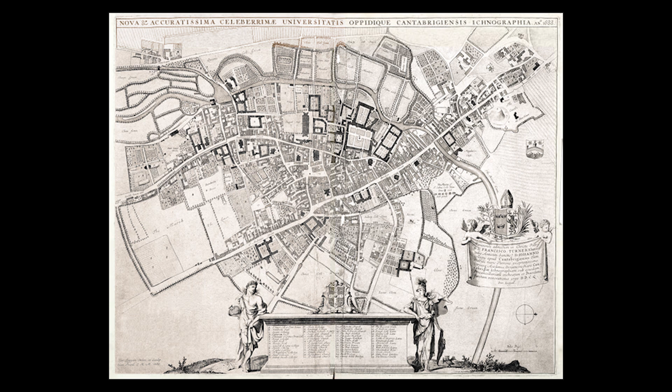So this map from the 1600s shows that while most of the colleges in Cambridge were located in the centre of Cambridge, Magdalene College was located on the periphery to the north of the river. The River Cam here, and this is Magdalene just to the north of it. It was initially established as a monastery for Benedictine monks, and it was said that it was located there to keep the monks away from the temptations of the town. And since then, there's been a sort of continuous tradition of academic study on the site for about 500 years.

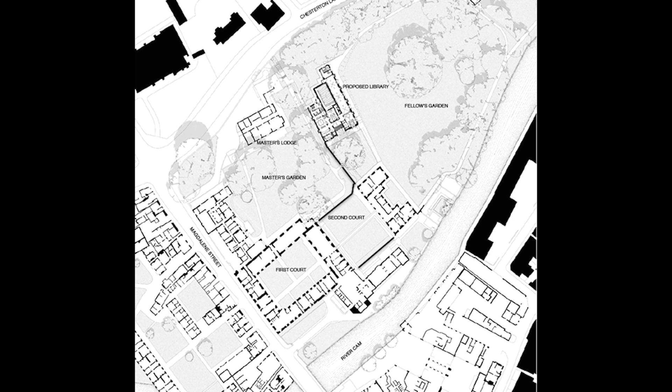And although the site, I guess, appears quite open, there were a lot of constraints which led to the position and massing of the building. The floodplain of the River Cam extends over a lot of the Fellows Garden. There's a lot of mature trees. There's a pet cemetery to the north, and there's a listed garden wall to the west.

And in the early stages of the project, there was a lot of debate about whether it was appropriate to put a new building here at all. And Historic England were very good; they sort of gave the planners confidence that a good building could be positioned here in this context successfully. And it was through those conversations that the exact position of the library was determined. So it's in line with the existing garden wall, and the entrance faces the side of the Pepys building, which extends the quadrangular arrangement of the college.

And I'll hand over to Tim now. Thanks, Claire.

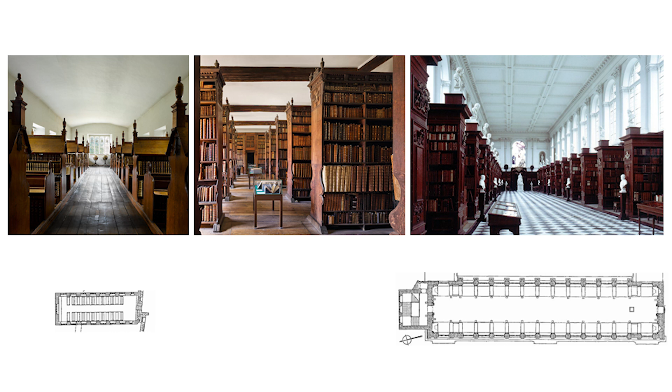These three images show a key period in the development of college libraries. The colleges in Cambridge and Oxford, there are three main spaces where the community comes together. One is the hall where they eat, one is the chapel, and one is the library. And so the spiritual, intellectual, and nourishment are provided in these three different spaces.

And so these three images of libraries in Cambridge show basically the impact of the printing press on the college library. On the left-hand side is Trinity Hall, one of the oldest libraries in Cambridge, and this is a lectern type of library. And we're interested in this relationship of the desk space to the reader and the illumination of the space and where you place windows in it and where the books are held. And so you begin in the beginnings of the college library.

Books are an incredibly rare and precious resource, and so they're all chained to the desk and they're held in these lectern arrangements where you have the books beneath and you lift them up onto the lectern and you read them standing up. And the room is a long room with a central aisle down the middle, and the reading space is off to either side, and it's illuminated from the sides by quite low-level windows.

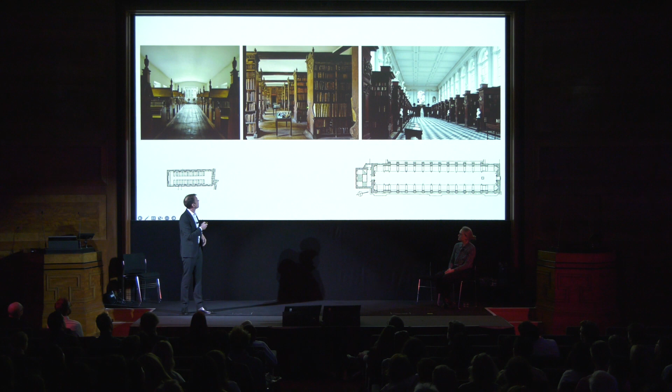And then as the quantity of books available increases, in the middle this is Queen's College Library, and here they've adapted a lectern library. You can see the curving bases of the lecterns have been chopped off at the top, and an extended bit of bookshelf's been stuck on the top. And this room is still illuminated from the sides, and that produced a problem because the room starts to become quite dark on one side because the bookshelves are cutting off the light that's spilling in from the windows along the sides.

And then in the final image, you see Wren's library for Trinity College. And here he resolves this problem by making it a two-story space and having light flooding in from above. And you can see the two plans at the bottom here, Trinity Hall and Trinity College, they're the same scale, so you can see the enormous expansion of the library as a repository for books. I do think the main problem of the Trinity College Library is, if I can dare to criticize Christopher Wren, that there's no way to gaze out of the window when you're bored of your book.

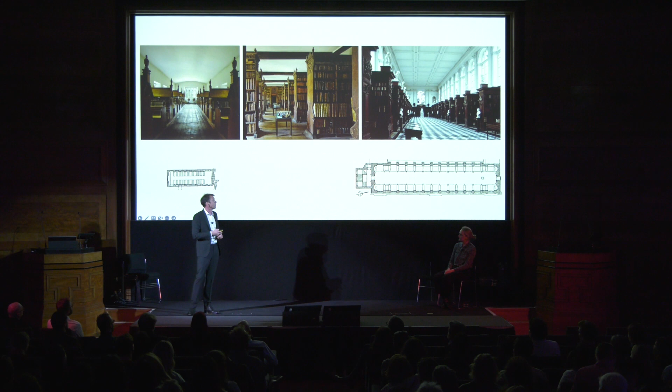So for Magdalene College's library, we wanted to produce something which had a bit of a mixture of all these types of space. The college had done a survey of all their students early on in the design process, and they wanted different things from a college library. And so we thought an inclusive type of modern library will be one in which people can situate themselves in different spaces around the library, rather than having a consistent type of relationship between reading spaces and bookshelves.

And so on the left, you can sit yourself in a larger grand hall if you like that kind of vista, you can find a small enclosed room with a shared table with other readers, or you can perch yourself into a corner in a little nook. And so in the design of the library, we tried to find a way in which we could generate a plan form for the library which produced that sort of variation.

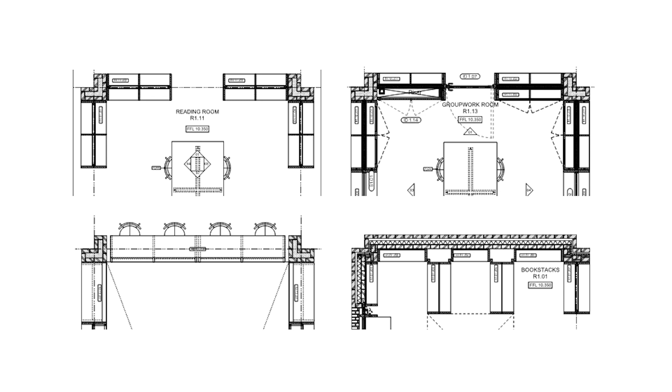And around the edges of that space, then we have a kind of zone, which is, you can see at the top left, big enough to accommodate a double-sided bookshelf. Below that, it can accommodate a desk, and it can also accommodate services and an external wall plus a bookshelf. So it was calibrated to be big enough to accommodate all these things, just about.

And that became a kind of essential dimension within our building, which is actually 3 bricks long. And then we looked at how we would aggregate those rooms into a larger plan. And we wanted the form of the room to remain legible within the plan.

And so we thought about this building on the left here, the Centraal Beheer office building by Herman Hertzberger. And it's an amazing plan form. And there was a sort of resonance for the project for us because he was trying to humanize, in a way, the open plan office. And we're trying to find a way to make people feel situated in an essentially open plan library space.

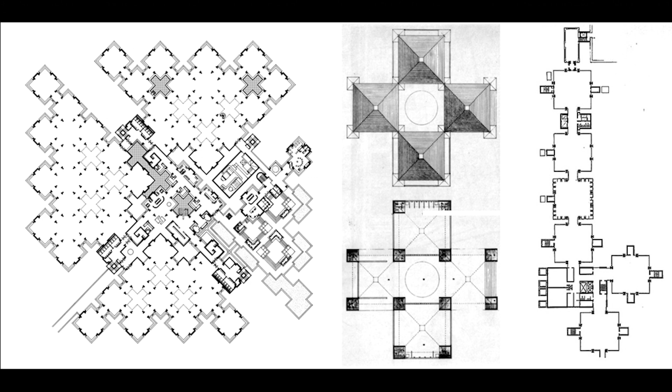And then the 2 plans on the right, both by Lou Kahn, the Trenton Bath House and the Richards Medical Research Laboratory. And in a similar way, we enjoy the way the different parts of the plan are legible. And they use this, what we call a tartan grid, which has a major and a minor interval within it to space the elements apart and give the building a kind of rhythm. And we thought that sort of plan form might allow us to produce the variation in seating types and position within the library that we were looking for.

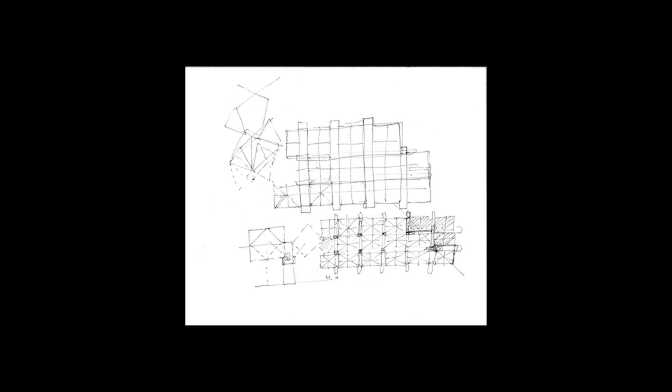And where they cross, you get a kind of node. And that gives us a wider space as a passing place, which allowed those passageways to actually be quite tight. They're only 1.3 meters wide. And those nodes we use to develop the structural scheme and the building services scheme for the building. And so our plan form is 3 bays by 5 bays, and it has a bit missing on its corner.

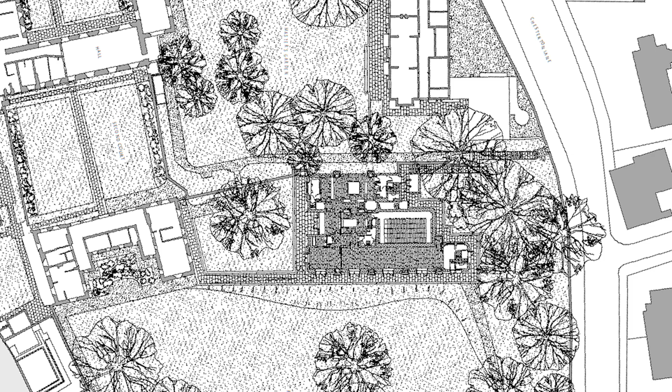And you can see when we put the plan into the site, as Claire was explaining earlier, that the building is kind of nestled into this bank of trees on the edge of the site, and its 3-bayed facade faces into the master's garden here, while its longer facade faces into the bigger space of the fellows' garden.

And then its short flank squares up to the end of the Pepys building, and part of that conversation Claire was talking about with Historic England: because our building is a bit wider, we sort of splay out this path so it doesn't run quite perpendicular to the back of the Pepys building, in order to give ourselves enough room to get our 3 bays in.

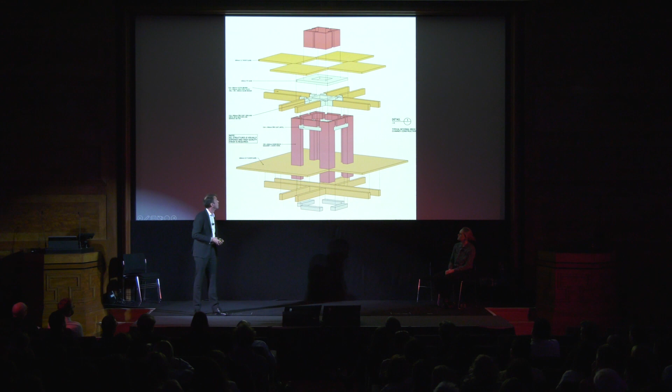And the lantern is just quite simply formed of 2 pitched roofs crossing at right angles, and the triangular gables are then glazed. And in the corners of this space, you can see that the load of the lantern drops down onto a point at this corner and then is brought down a brick column in the corner. And this is the structural diagram for how that works.

You see the L-shaped brick column dropping down through the floor plates, timber floor plates, and then the main structural beams, which then pass through those columns, resting on precast concrete lintels that connect the columns together.

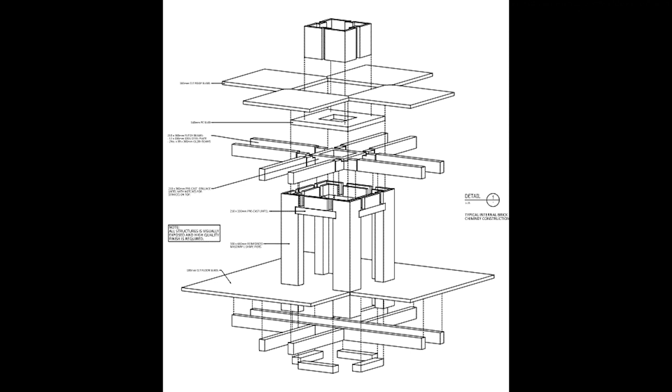And these brick constructions rise up through the building and become chimneys as they exit through the roof, which Ben will talk about later. And this gives you this landscape at roof level of folded roof lanterns and then pinned in place by this set of chimneys.

And so having made this kind of spatial matrix, this mat-like building of squares set apart by passageways, we started to think about how you would navigate through the library. And we knew at this point that the library would need to be spread over 3 floors, and that at the ground level there wouldn't be very much library. And there was a long conversation, which is an interesting one, with the college about how we would connect the entrance to the library, probably where the librarian would be, with the upper floors where most of the library floor plate would be.

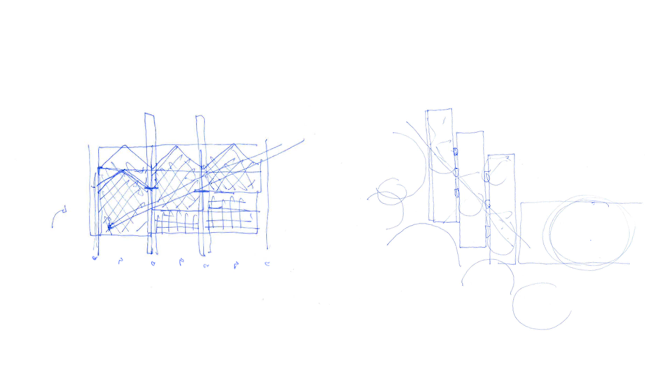And we had this idea of a journey through the library, which was a sort of diagonal upward journey towards the light, towards the view of the river and the garden that the building looks into. And it produced this kind of diagonal movement in the section. And you can see it here in this sectional sketch from the ground floor up to the top of the building. And we thought this diagonal movement might also be matched as a movement in plan.

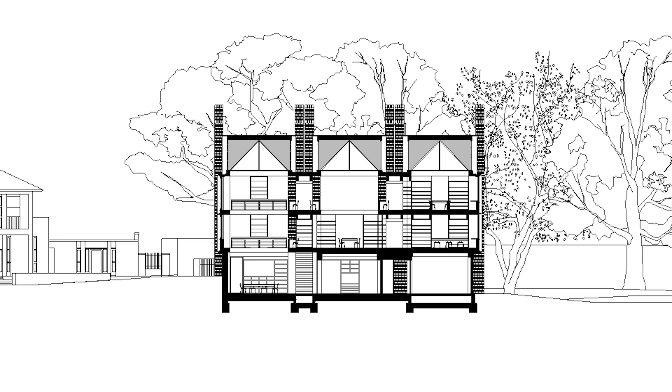And so this is the building section. You come in here at the base of the building at ground floor level into a 3-story space here, and you make your way up to the first floor. The first main level of library is via a stair, which delivers you into a 2-story space in the middle of the plan, and then you find another staircase, and you work your way up to a room sort of up in the roof with the view out towards the garden.

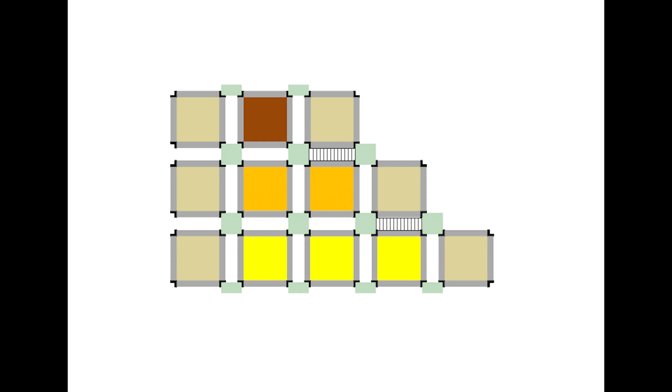And that movement, as I said, is matched in plan. So you see this is the 3-story space. It's 1 bay in plan. The 2-story space in the middle is 2 bays in plan, and the single-story long reading room at the top is 3 bays in plan. And they're connected by stairs at the ends. So you get this kind of diagonal movement through the building.

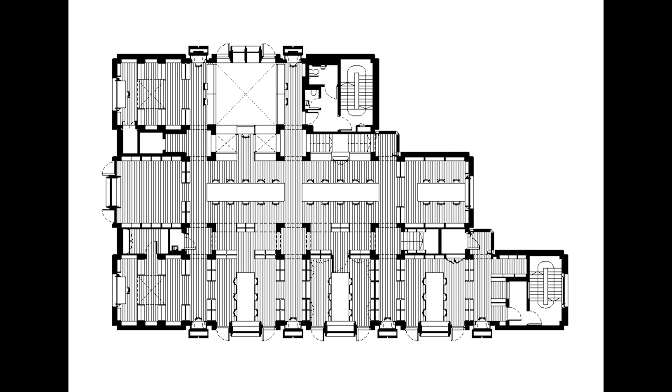before you head back in, and you arrive at the north end of the central reading room with a long reading table down the middle of that plan. That's our sort of grand space within the building. So this is the first floor plan, and you've arrived here on the stair at this little bay window, and you're standing here looking down that long space. And all the smaller rooms are arranged along this side of that reading room, so they get the view out towards the garden.

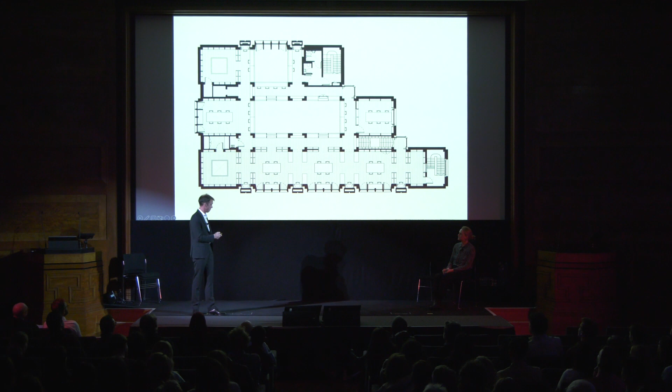And so while we've been kind of enjoying the organization of the building as a problem to solve, the client for the project was very concerned about this object that they were going to put within the historic centre of the college. And they became particularly concerned when we started talking about putting chimneys on the outside of the building, and thought that we were going to make some sort of factory. So we had an interesting conversation with them about that, about the design of the outside of the building.

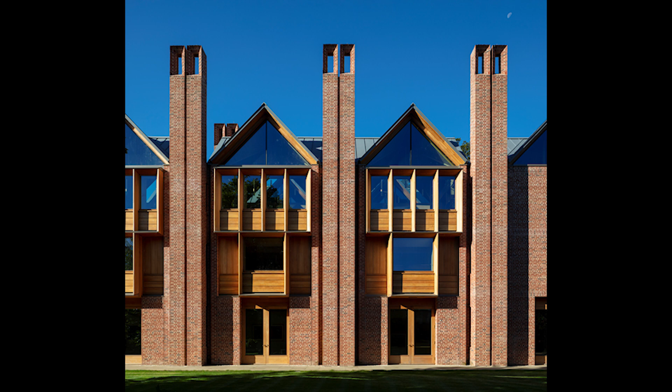Initially, we looked at lots of different options for the strategy for the building. We looked at fully air-conditioned, we looked at mixed mode, we looked at natural ventilation. We also visited several different libraries around Oxford with the college, and there was a clear preference following that for natural ventilation. So that's how we arrived at the strategy for this. We wanted to make use of manual windows in the facade so that people can just control their own environment.

To help make that work, we made use of the chimneys on the roof of the building to allow the stack effect, so buoyant air leaves the top of the building, bringing fresh air from the outside through the facades. The brick construction actually boosts that effect, so the fact that they're being warmed in the sun adds to the buoyant effect of air being drawn up and out to the top of the building.

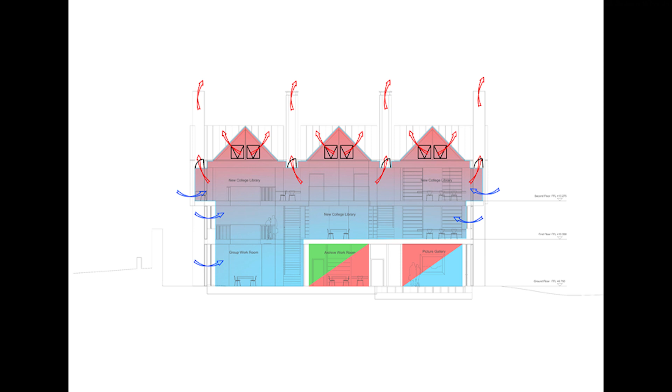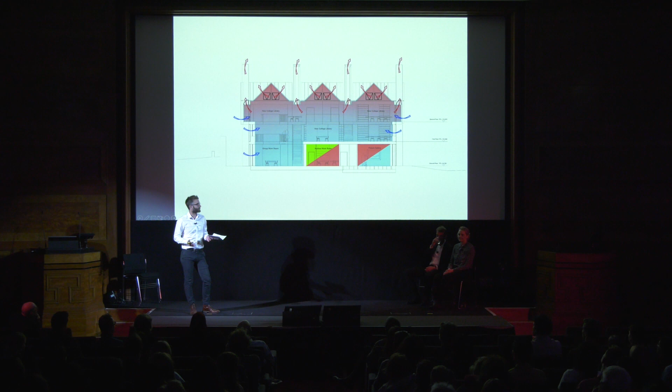So the chimneys are also key for winter ventilation. They're located in the center of the plan, and opening them a little bit will allow cool air to enter reasonably far away from where occupants are seated, so avoiding issues with drafts. Each of the chimneys has an actuator at the base, so that keeps the thermal line of the building reasonably straightforward. They're in the plane of the roof, so avoiding having to insulate the chimneys.

They're controlled on temperature in the summer, so when the temperature gets above 25, they begin to open. And then in the wintertime, they're controlled on CO2 in the space, so when that gets above 1,000 parts per million, they will begin to open. We also have additional openings in the roof in the centre of the plan, which are primarily for smoke ventilation, and they also boost the natural ventilation when everything's open in those hottest days.

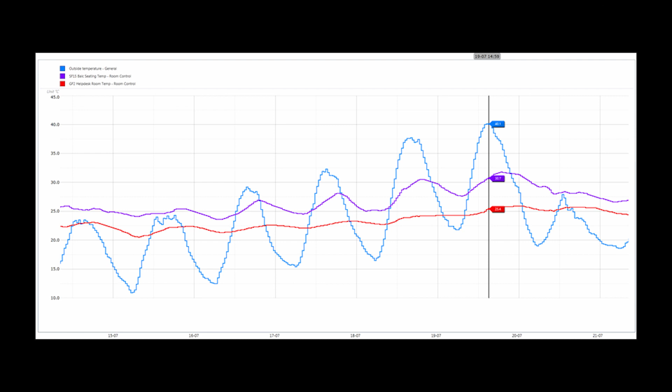So how does it perform in the recent heat wave of July? So you can see there, 19th of July, we had 40 degrees in Oxford, and I think quite successfully on the ground floor we had 25 inside and just over 30 on the top floor, which I think is quite successful for such an extreme test.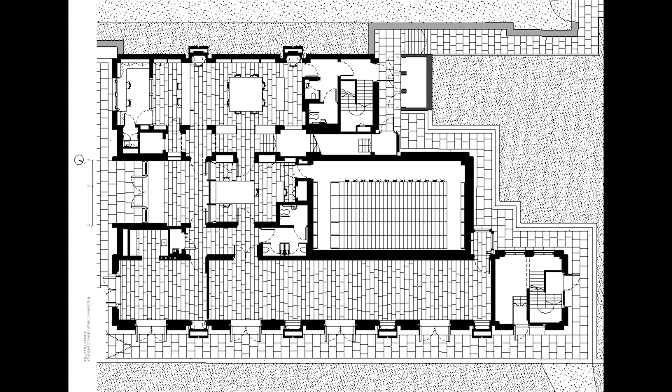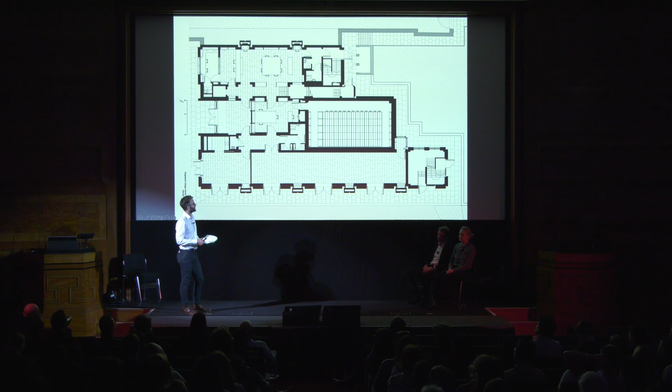Moving on to the archive, which we have in the centre of the plan. So at the ground floor, as Tim mentioned earlier, we have the storeroom, as you can see in the centre at the bottom, and in front of that, the reading room, where readers will have a look at material that has been brought out by an invigilator. So the brief for that was to consolidate a lot of different archival stores that the college had that weren't particularly well controlled.

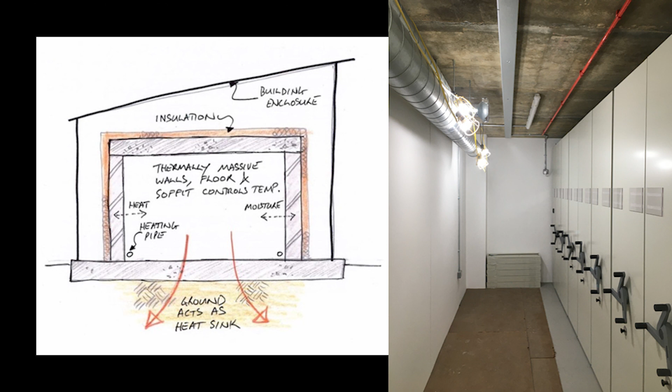So the brief for this space was for a mixed paper archive, and that requires stable temperature and quite low humidity. So the design we came up with was for a passive approach, which avoided complex and expensive systems, and instead relied on passive ways of keeping the conditions stable. So we use an uninsulated ground floor slab, which acts as a heat sink to make use of thermal mass below the ground. The space is incredibly airtight and very well insulated, and makes use of thermal mass on the inside, so the structure of the archive itself.

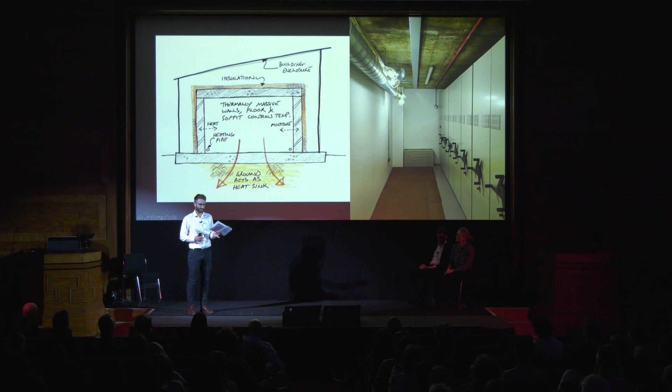It also has a small ventilation system which runs from time to time when the conditions outside are right, so that it gets some free cooling or some free dehumidification. And there's also a small dehumidifier, which again runs just to keep the humidity below an upper limit. And again, how did we perform? On that hottest day of 40 degrees, no air conditioning, and we have a stable 20 degrees. And the temperature in there just follows a gentle swing across the seasons, getting to about 16 in the winter and about 20 in the summertime.

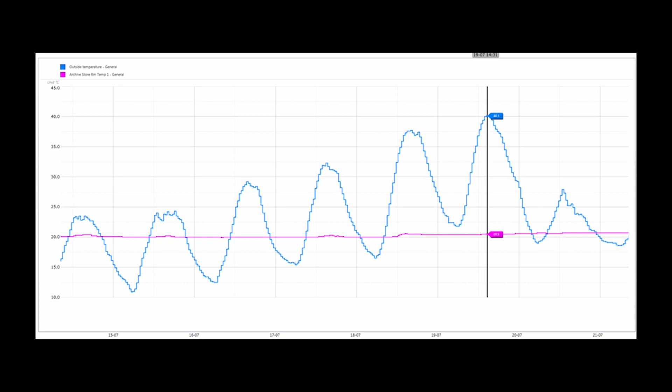Services distribution through the building was quite a challenge with all the exposed structure. So we came up with an approach which is to put all the services within a floor void instead of a ceiling void. So by separating layers that are already in the project, the CLT structural slab and the timber floor, we can get that void without having to add very much material to the building.

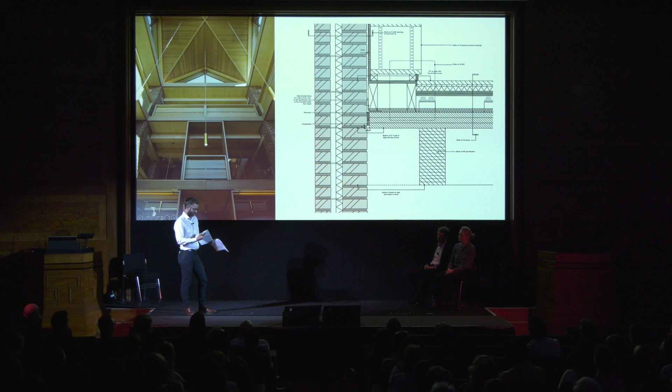The underneath of that soffit, you can see where we had lighting, cabling and other things would just pop straight through from that void, through the slab to connect where they needed to be. So the lighting design in the building made use of pendants and surface-mounted light fittings, which are set to just sort of a background lighting level.

And then bookshelves, we have a light fitted to the top of each of those, which sort of helps illuminate the books so that people can identify what they're looking for, and also just define the edges of all the spaces and help people navigate around. And then task lights on the desk so that people can control their own environment and keep the brighter bits just to where it's needed.

External lighting was really kept to a minimum. We wanted to keep it in keeping with the rest of the college, which is quite a dark space at night. So it's really just provided to the path at the front, the entrance, and then highlighting some of the key features on the facade facing the Fellows Garden.

Thank you. I'll pass back to Claire. Thank you, Ben.

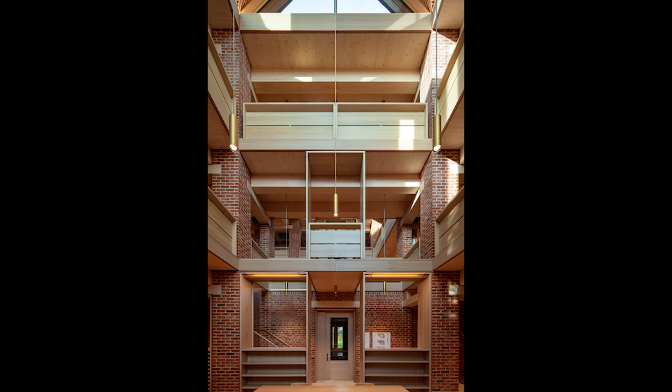So the building is made primarily from two materials, brick and timber. Externally, the brick relates to the existing buildings of the college, and internally there's a warp and weft of timber elements that sit between brick piers. And we wanted it to feel very crafted and intuitive, so that pieces of structure that you can see are visibly sitting on the other piece that's holding it up.

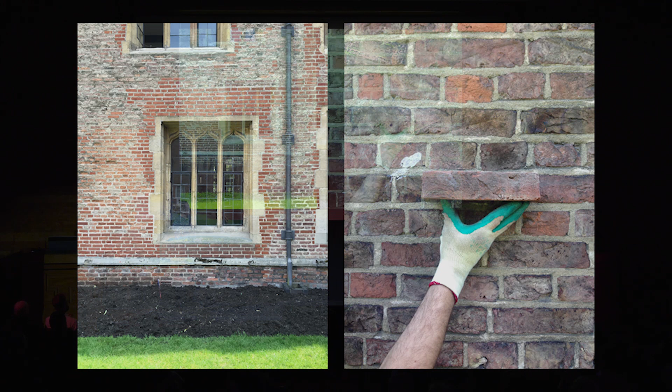And the existing college buildings display rich tapestries of brickwork that have been repaired over centuries. And this repair work has added to the pattern and the quality of the brickwork, and we wanted to try and get some of this character into our building. We had gone through a process of choosing a brick. We had it approved with the client and the planners. And we found out just before the building started on site that brick was not going to be made anymore. It was going out of production, which gave us quite a fright.

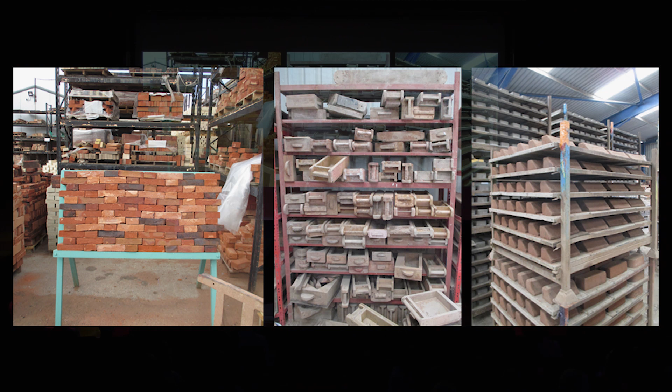But the site manager, Julian from Cocksedge, then introduced us to this brick, which was a brick from York Handmade. And it had a really nice textural quality and a nice mix of colours that sat really well beside the Pepys building. So we explored that further, and we went up to York Handmade with Cocksedge, and we worked very carefully with Cocksedge and with York Handmade to develop a mix of colours and textures that would sit well beside the existing buildings.

And we got to see how in the factory they throw the bricks by hand, and they sort them by hand, and they're made in these timber moulds, which gives the surface a really nice texture. And these were the four colours that we ended up using in the mix. And this was the first sample panel where we got the ratios of the colours to the correct mix that we wanted.

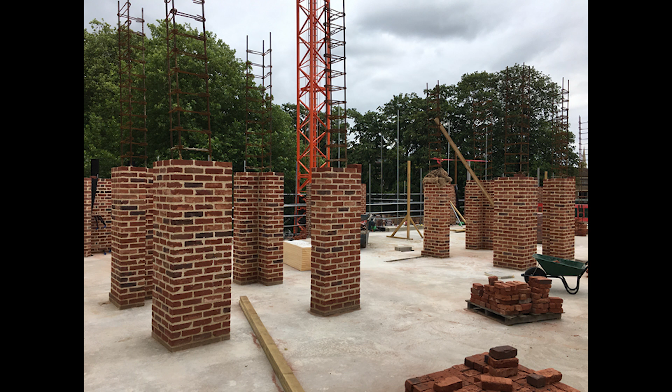The bricks are about 5 millimetres smaller in every direction than a standard modern brick, and the mortar joints are 5 mil larger, so they're 15 mil joints. The mortar is a mix of sand, cement and lime, and it's brushed to reveal some aggregate. And the vertical structure of the building is brick, so a key part of that is these L-shaped piers that rise up through the building. They're brick filled with mortar and some reinforcement.

And then the external wall of the building is quite traditional. It's 2 leaves of brick with insulation and a cavity. And this point in the project was quite early on, but it was quite challenging, I think, for the team on site. And for us, there was lots of things happening because the building with its visible structure sort of changed the sequence of a typical building, I guess. And we were setting out the pieces that would be the finished surface, and then we were also working with teams who were making items off-site as well.

And yeah, a challenge for the site team to get the tolerances right, and then there was quite a complex mix of bricks, so we were keen to not have any cut bricks. So the team at York Handmade were making these bricks, and we ended up having sort of one brick for every letter of the alphabet, and it was quite nice. They turned up on site with their names imprinted on the surface.

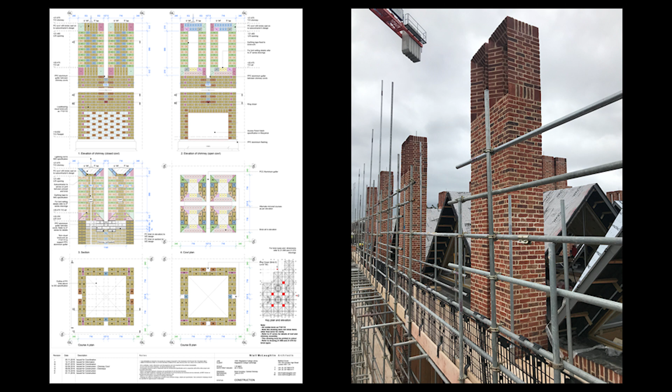And in some ways, I guess the building is quite traditional. In other ways, it's highly engineered, and it took collaboration between people with a wide range of skills to be able to make it happen, and that collaboration was really key to its success. So when we reached this point at the top of the chimneys, it was a real moment of celebration, I think, for the whole team.

The project was design and build, so we were novated to the contractor, and I think while we were working for the client, and also when we were working on the contractor's team, there was a real sense of dedication from the whole team, the client, the builders, the engineers, the consultants, to build a building of really high quality that would last for a long time.

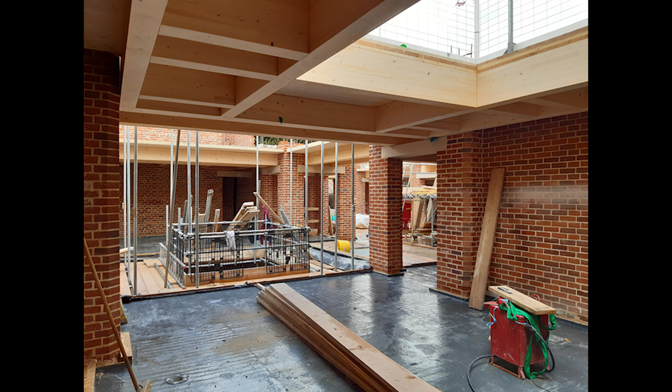And then the horizontal structure is timber, so it's CLT slabs and glulam beams. We worked quite closely with Smith and Wallwork, the structural engineers, and also Eurban and Neue Holzbau, who provided the CLT and the glulam. The glulam came from Switzerland, and I think they've estimated that it would take just under 8 minutes to regrow the structural timber for the project relative to how much timber is grown in Switzerland.

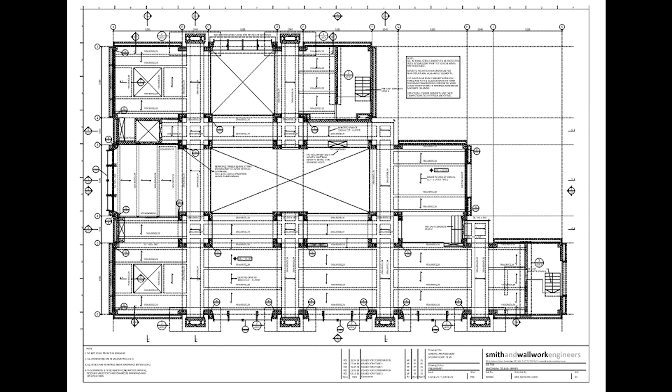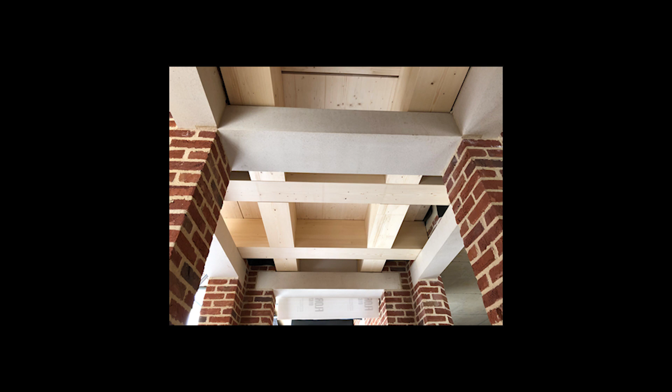And so the plan of the building shows these large glulam beams which run along the passageways, in keeping with the grid plan which Tim explained earlier. Where they cross at the node points, they create hashtags which sit between the brick piers. These timber hashtags rest on precast lintels, and the precast lintels are built into these brick piers which rise up through the building to support the chimneys above.

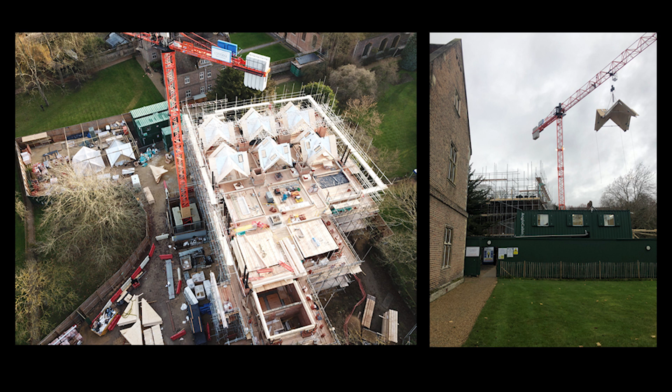And the lanterns are made of CLT panels, so these very large pieces of CLT were arriving on site. It was like a big jigsaw puzzle, and they were then assembled beside the site, and then they were craned into position. So this is the first lantern being lifted into position.

I'm now going to hand over to Simon from Smith & Wallwork, the structural engineers. Yeah, thank you. So, structural engineering and the process for the new library. I'm going to run through three areas: design development, detailed design, and then a few images of construction to finish off.

So design development, RIBA stages 2 and 3, you can see we work on lots of different ideas. There's a few sketches of mine, how I communicated with the team, exchanging ideas, and that really is a small part of what is a very complex project. This is a very quick insight into my brain and how I look at projects. And you saw some of the early concept sketches from Tim.

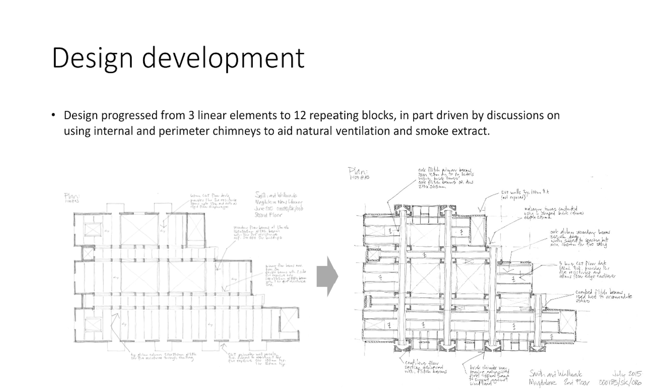On the left, you have the first interpretation of a simple single span timber structure onto a series of spine walls. And as the design discussions developed with the team and the idea of the natural ventilation, that became more a series of cells or blocks rather than three linear spaces. And you can see we've changed to a more two-way spanning primary and secondary beam structure.

And as Tim said, it was an architectural competition, which Níall McLaughlin's won, very much an influence with brick and timber structures or features in the building, and the structure very much formed the architecture in some respects. There's nowhere for the structure to hide on this project, but that mixing of structural materials provided some interesting technical challenges, from differential movement of materials, fabrication and installation tolerances, and also some interesting logistics challenges, with multiple trade packages having to stop and start as they build.

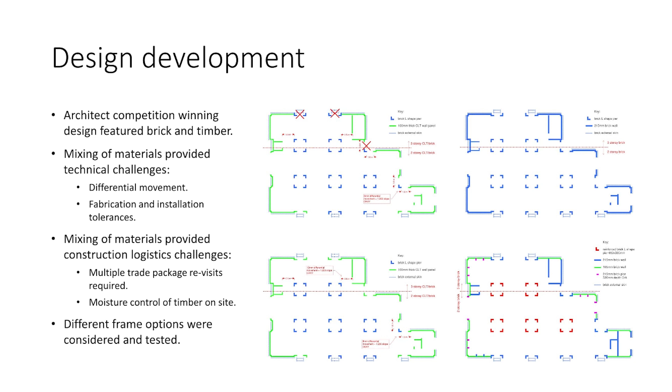And that process of stop-start gives us some interesting thought processes and challenges on moisture control of timber during construction. As you can imagine, that discussion was very long. We did consult quite a lot with the industry early on, and got lots of different opinions. And we even dabbled in trying to mix precast brick-clad concrete with timber.

And one of the reasons for doing so was this sort of differential movement issue, and the fact that actually concrete and timber were working quite well there, especially when you started looking at balloon frame construction. When we're putting timber very close to concrete or brickwork, we have to worry about how much movement there is. So that was a quick contemplation. It didn't last very long because it wouldn't have worked for a number of reasons on the project.

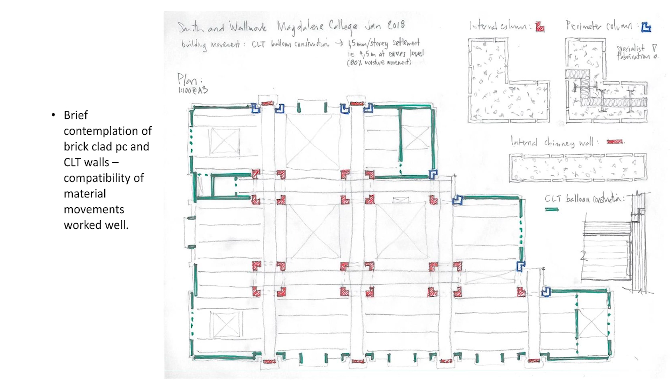Anyway, we ended up, as I say, focusing on load-bearing brickwork structure, CLT floor deck with originally actually oak glulam structures and beams, and primary beams were having to be flitched because of the floor loading and the deflection. But along the way, that changed to spruce, primarily, I think, driven perhaps by cost.

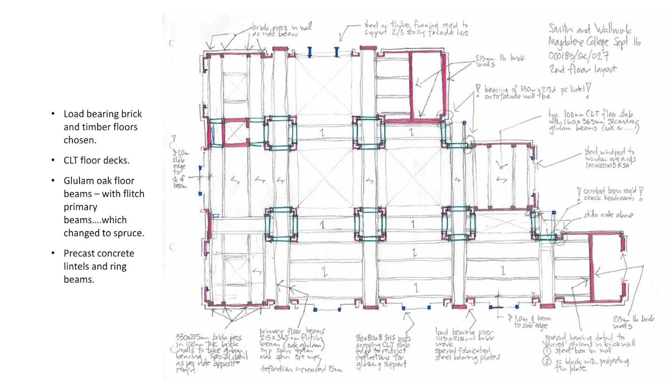But actually, there was an interesting discussion around how a CLT floor slab and oak glulam beams would fit together visually. And then we had quite a large element of precast concrete in terms of lintels and ring beams and precast stairs. So there was a real mix of different materials, and ultimately the building sat on a facade that was almost traditional house building construction, a traditional cavity wall construction, 100 brick and 100 internal brick. So yeah, really quite traditional methods of construction.

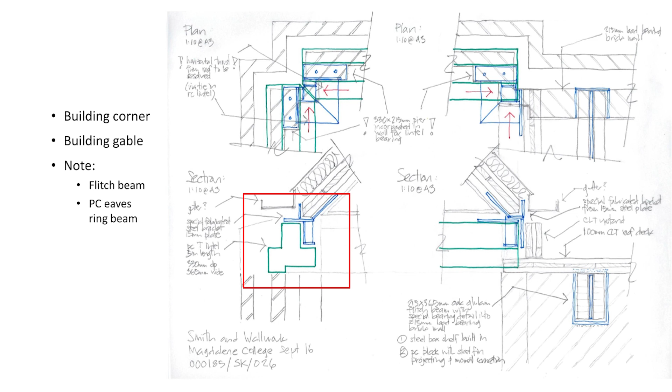I mean, those sketches also, the devil's in the detail, working out how all of those things fit together. This is the building corner details at the top of the building, at the roof, and the building gable details. We've got some flitch beams in there, and if you can just about spot, there's a precast, what I call boot lintel ring beam going around the whole building. And then I can't use Revit, so I do everything in sketching. So here's the T lintel centrally. So this is internal chimney.

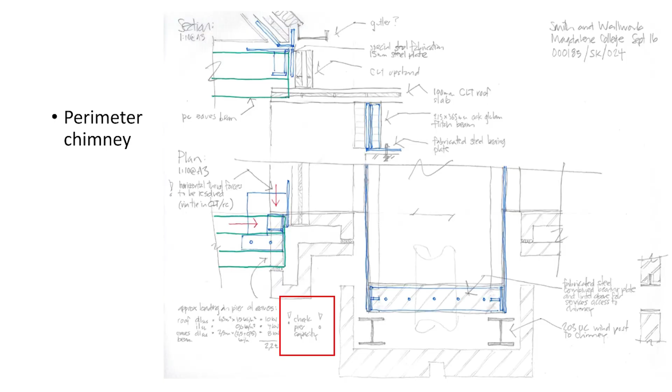There's me trying to get all of those things to marry, and you can just about see the roof perching on the internal L-shaped columns, which are reinforced because they're helping stabilize the building, bizarrely. And then even at the perimeter chimneys, some more balancing act going on with some big bits of roof coming down and sitting on an internal leaf of a cavity wall. And there's two exclamation marks there on my sketch, making the architect understand how hard I was working for them to make it all fit together. So that's an insight into how we swap information with architects and other members of the design team.

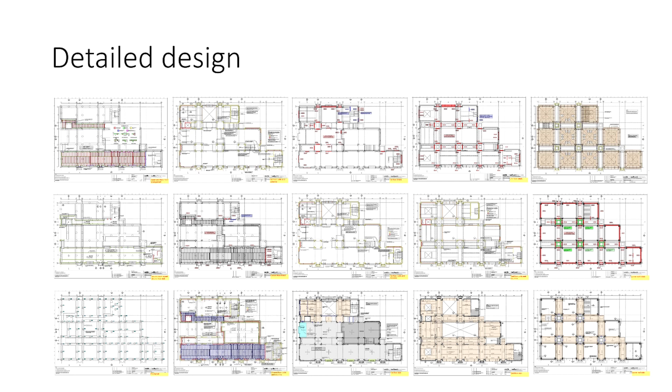And then we move to detailed design. This project had 3 GAs for every floor level, which is quite interesting. So you have a CLT slab and beam arrangement. You then have what's holding that up in terms of a load-bearing masonry arrangement. And then sandwiched in between those two, you have a lintel and beam arrangement as well for each level. So you end up with quite a few GAs on this project and an awful lot of what they call detailed drawings.

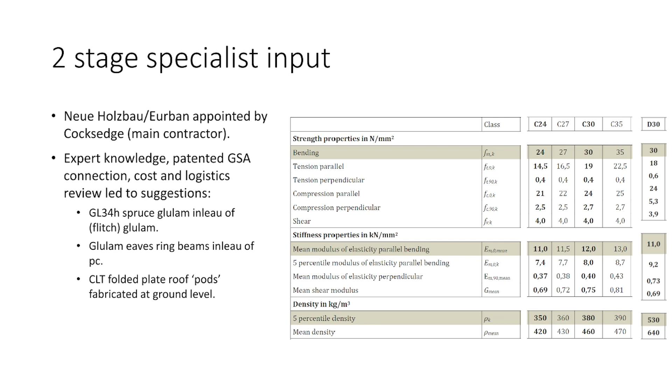We had a 2-stage tender, and Neue Holzbau and Eurban, working collaboratively, were appointed by Cocksedge, who were the main contractor, and they brought in some quite handy, useful and timely innovations to the project. Their expert knowledge and Neue Holzbau's patented GSA connection details and costs and logistics really helped bring things to site. And one of the big impacts was being able to bring in GL34H spruce glulam in lieu of the flitch beams that we were looking at, changing that precast boot lintel into a glulam boot lintel ring beam around the building, and the CLT folded plate roof pods, that striking image that Tim showed, that was an innovation brought by Eurban and Neue Holzbau about building them on the ground and then lifting them in.

And then looking at the library loading, and that's where this change from flitch to the spruce GL34, looking at the different load cases and the long-term loadings, and because the book stacks were quite a main part of this loading, making sure that we took account of the creep loading, which accounted for something like nearly 30% of the final long-term loads.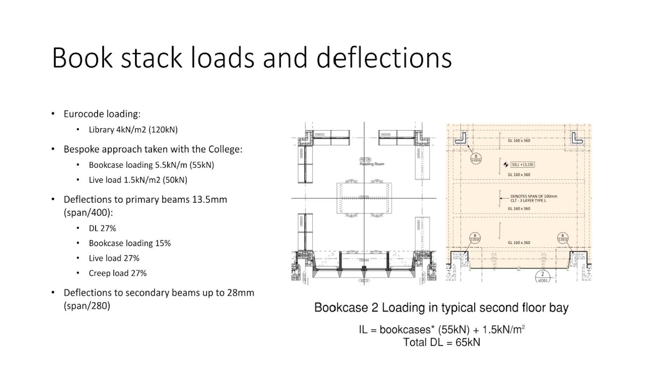So some quite detailed discussions with the library and the architects and everybody on deflections and things were required. Here you can see the general floor arrangement. So we've got the 1, 2, 3, 4, 5 internal chimneys, and then the perimeter chimneys around.

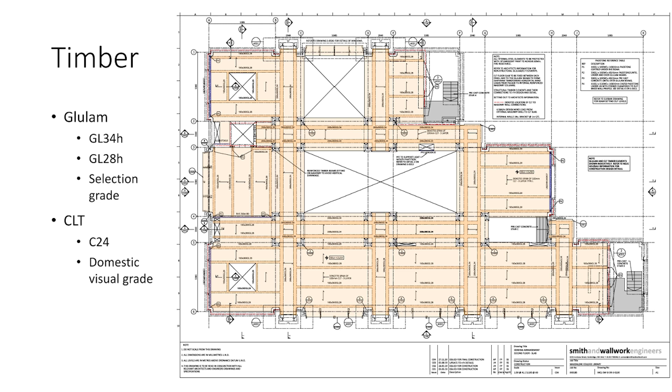As I say, they were L-shaped chimneys that you could walk through, and then we have the primary beams running through the page, and then the secondaries within, and then we have a mimicking of these beams through here with the hashtags internally. Here's the GA showing the brick layouts.

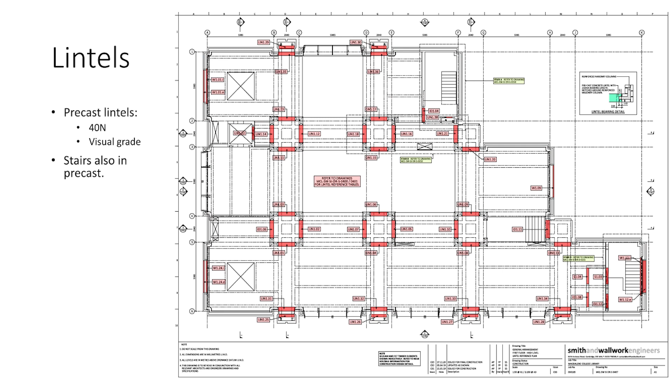Had 17 Newton handmade bricks in M4 mortar, and then we also mixed in some standard bricks, 20 Newton bricks, around the perimeter where they were covered with book stacks, and the lintel layout, the precast lintel layout.

Lots and lots of detailed drawings, as I said, internal chimneys which are also acting as smoke venting, and in fact here the masonry runs all the way through, a bit like what I would call balloon frame construction. The timber doesn't interrupt that load path as such, but the timber does interrupt the load path through the perimeter chimneys.

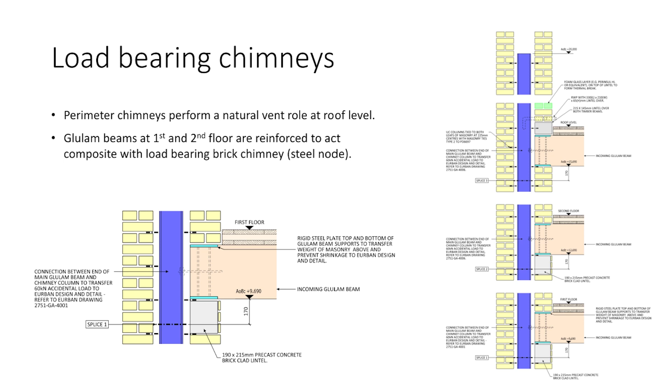And that's where Eurban and Neue Holzbau brought in these details with sort of reinforced bearings that allowed load paths to run through the timber because of the really small amount of area we had to land structure on brickwork. It was all very, very delicate bit of engineering and architecture and construction, I should say.

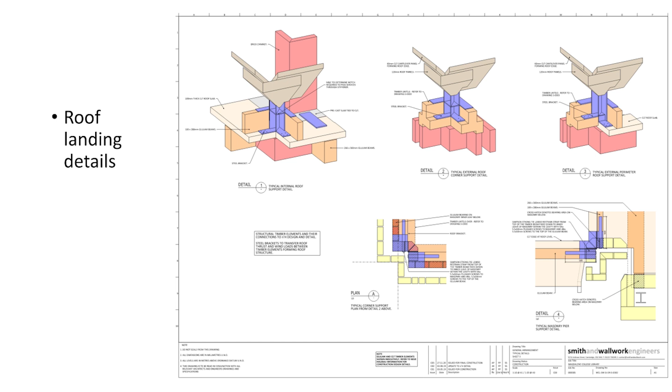And then again, the balancing of the roof pods on top of those cells with these steel shoes. Lots and lots of thoughts going in there, thinking, and Eurban were key in unlocking some of those options and details, working with them in the construction stage.

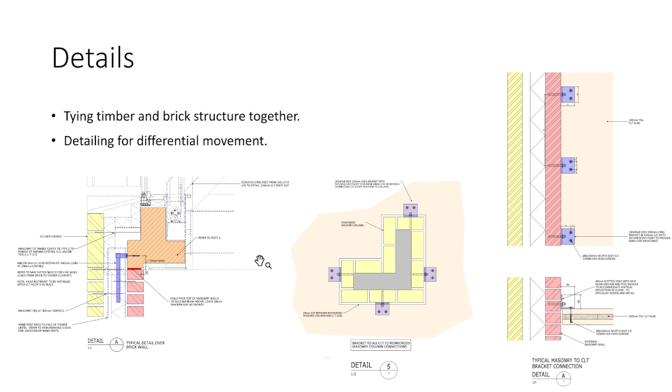The whole timber floor plates were diaphragms and locked into the brickwork, but XY locked, Z direction allowed to move, so the building was allowed to breathe, if that makes sense. And you can see some of the sliding joint details here, and these strange glulam boot lintels.

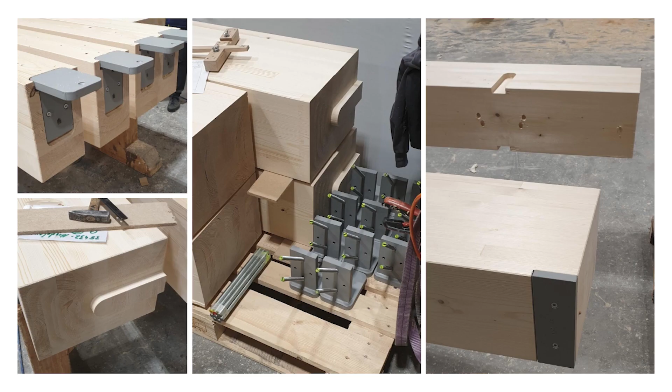I think these are somebody else's photos, but so you can see all the details, and this is an enhanced steel bearing to allow us to just about sit this glulam beam on a bit of concrete internally underneath one of the chimneys. So it's a reinforced bearing, and some hidden secondary beam bearings that sit on a primary.

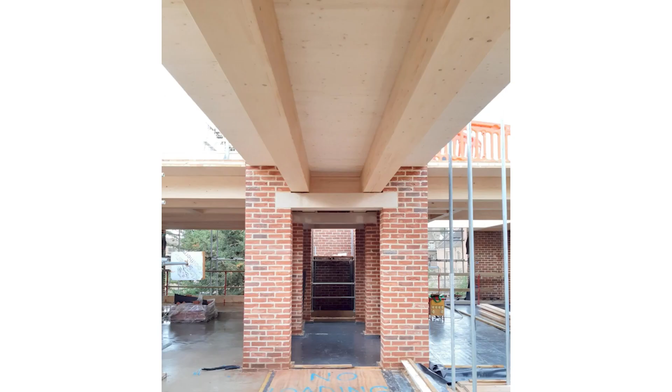There's some more construction shots. There's a first floor, and you can see the underside of the timber structure. And then the tolerances that Coxedge and Urban achieved on site were quite phenomenal. Really fantastic bit of work.

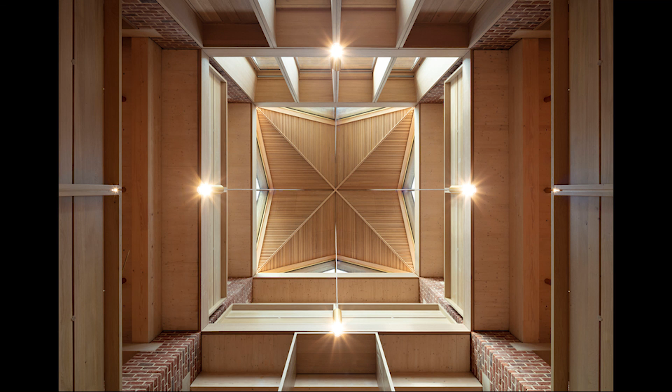The steel shoes that were just shown, I guess in the photo they look quite small, but in reality they were actually sort of the size of little stools, just to give you a sense of the scale. And they were actually quite important pieces. So, for example, there's one of those little stools sitting on the corner of each of these lanterns.

And they enabled, I guess, we wanted the lanterns to sit very finely on each of the corners, kind of like a stiletto at each corner. And they also enabled, in these quite pinch points of the corner, the services to run around the perimeter of each of these rooms at that level.

And you can see in this photo, it was quite impressive, the level of accuracy that Coxedge and the bricklayers got with quite a wobbly brick over these 3 stories. This is continuous rising up and then supporting the lantern at the top.

And there was some variation with that tolerance in the size of the lanterns when they arrived onto those pods. And then the joiners worked with another level of precision inside that, and they clad the underside of those lanterns with the acoustic absorption underneath, and then slatted timber below that.

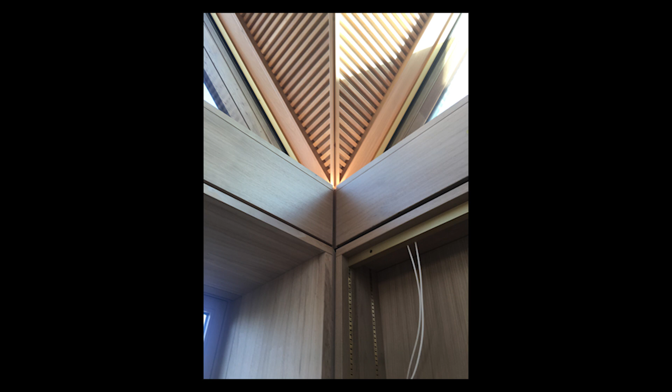And at the apex of those lanterns, there starts this shadow gap, and it continues downwards to reach the bottom of those lanterns, where it meets another shadow gap between the bookcases. So these two bookcases come in and sit at the base of that, and another shadow gap runs around the base of the lantern.

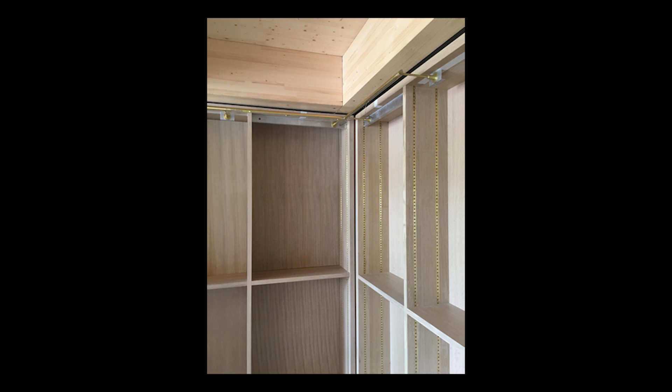And that 15mm shadow gap, I guess, could nearly be followed around the whole building. It's quite important. It kind of relates to the 15mm joint of the brickwork, but also technically it was quite important. The beams, we set a limit of a max of 15mm deflection. So the 15mm joint, which runs around the bookcase, allows that space for the deflection of the beams.

And internally, I guess it's sort of a timber world, and you can see in this image the bookcases, the tables and the desks are all made from European oak. There's almost 2 kilometres of shelving in the building. And we were having quite frequent conversations with the librarian, who, at the same time that we were planning out the library and working with the joiners to make the bookcases, was planning which books they would be putting in each section and trying to understand the linear metres.

And at the same time, quite early in the construction phase, because there was so much joinery, the joiners actually began making the bookcases quite early, and they stored them off-site for quite a while before bringing them to site. And in the design of the joinery, we wanted to continue this language of the continuous planks visibly resting on the thing that's supporting it. So you can see in the design of these tables, there are these long planks of European oak, and they're supported again underneath with more planks.

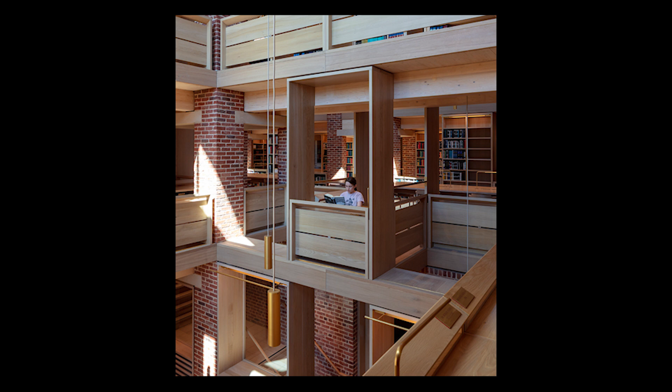And I'll finish on this slide because it's been quite nice to see the students coming back into the library after a few years of studying at home, and seeing them interact and use the library. And this image also reminds us of the painting of Saint Jerome that Tim showed at the start. So thank you very much.

Thank you, Claire, Ben, Tim. I'm also going to invite Níall to come up to the stage now. The last picture of Saint Jerome was actually an 11-year-old child prodigy, I understand, who's the daughter of Níall and Mary, or perhaps she was just a free model for the photo shoot.

An extraordinarily succinct tale of a very, very complex project. Also talking about the history of the college, but also relating back to the history of your work, what you're interested in, going back to Caen, but also the sense of place, back to a window in South London that you did 30 years ago, which I think is quite a nice thing for all of us, that in your career you are making ideas that you can continuously revisit and build.

It was a long journey, this project? A dozen years, 10 years? 2014, yeah, probably. And 7 years. Interesting, because it's highly complex to be very simple. Was there any moment where you felt the hashtag or the ring beam or any of these elements, and these ambitions of the 15mm shadow gap that you were tracing around 2 kilometres of shelving, that you might have expected too much of your builder?